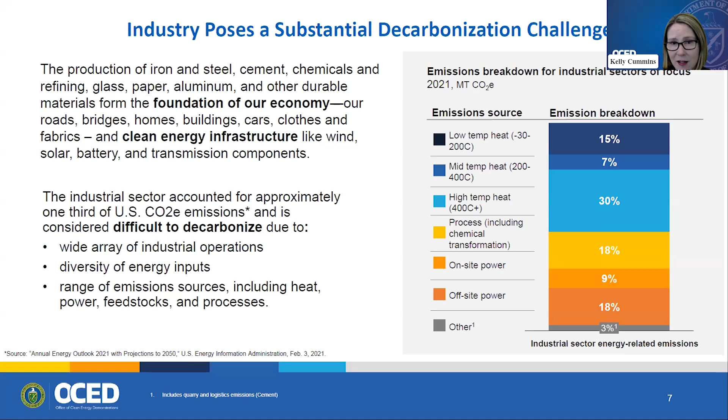The industrial sector is one of the biggest unsolved clean energy transition challenges and one of the most substantial opportunities to reshape the U.S. economy and reinvigorate the U.S. manufacturing sector. This investment in new emerging technologies will help produce clean steel, cement, and chemicals used in our nation's roads, bridges, transmission lines, electric vehicles, solar panels, and wind turbines, which in turn benefits every American.

OCED's Industrial Demonstrations Program represents a more than $20 billion public and private investment to accelerate transformational decarbonization projects in our nation's energy-intensive industries. This $6 billion catalyzing federal investment will help buy down risk in the highest emitting industrial sectors by applying a wide range of technologies, from energy efficiency upgrades and electrification to enabling hydrogen-ready fuel switching and carbon capture, utilization, and storage. This program offers a critical opportunity to solidify a first mover advantage for US industry, positioning American companies as leaders in the clean energy economy.

By implementing these projects, US manufacturers will produce many of the world's cleanest goods, which will be sought after both domestically and for export internationally as global consumers, businesses, and individuals increasingly demand transparency about carbon intensity.

So how did we get to this stage? Last March, about a year ago, OCED put out a funding opportunity announcement for the Industrial Demonstrations Program. And this turned out to be an incredibly competitive funding opportunity. We reviewed 411 concept papers in response to this funding opportunity that requested more than $60 billion in federal funding and proposed about $100 billion in matching private cost share in total.

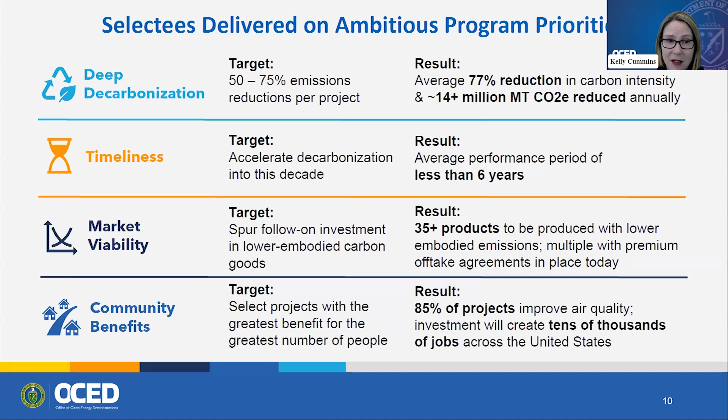Finally, we prioritized projects with the greatest benefit for the greatest number of people, especially as it relates to community health. We know that while industry provides good jobs and serves as the economic heartbeat of its communities, it has also resulted in pollution that has disproportionately harmed disadvantaged communities. We are proud to say that 85% of projects will reduce criteria air pollutants, which can harm human and environmental health. Additionally, this investment will create tens of thousands of jobs.

While over $20 billion is a huge advancement in industrial decarbonization, it is only about 2% of the total $1 trillion investment needed to decarbonize the industrial sector. Early commercial deployments of decarbonization technologies in sector-specific applications could drive cost reductions and encourage cross-sector learnings, which could boost the value proposition of similar future projects. I'm proud to say that these projects are catalyzing the scale of investment needed to meaningfully decarbonize industry.

With that in mind, let's turn to the projects we've selected to accelerate industrial decarbonization across the United States. Now that you have more context for the program and how it fits into our climate and equity goals, I will turn things over to Todd Shrader, the OCED Director of Project Management, to share more details about the projects we've selected.

Thank you, Kelly. And as Kelly mentioned, 33 projects were selected, and we're going to very quickly discuss them today. They're across multiple industries, including iron and steel, aluminum and metals, primarily copper, cement and concrete, chemicals and refining, and some cross-cutting heat projects themselves.

One thing I will note as we go through these slides, in most cases the location is shown. In a few cases it's TBD or something similar, because we're still determining these very specific project sites in a few cases. So you might see that on the slides themselves.

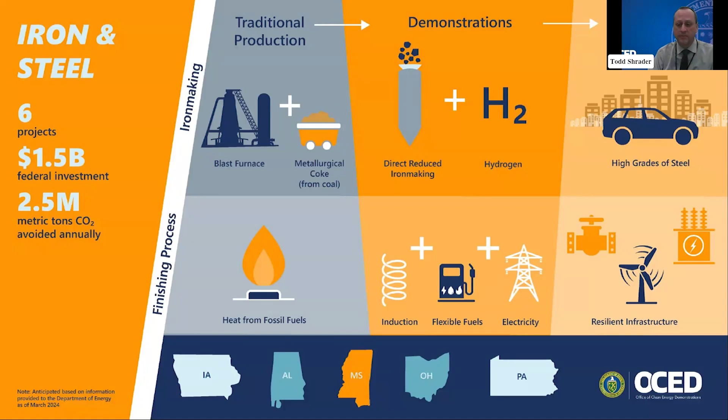So you see there: six projects, $1.5 billion total investment. These projects alone have the potential to avoid nearly 2.5 million metric tons of carbon emissions each year.

We will start in Middletown, Ohio, at Cleveland Cliffs Steel Corporation. This project is a good example of changing out the process itself, moving from a fossil fuel process for heating steel to a direct reduced iron process that uses electric melting furnaces, with a significant reduction in carbon emissions—up to 1 million metric tons per year going forward.

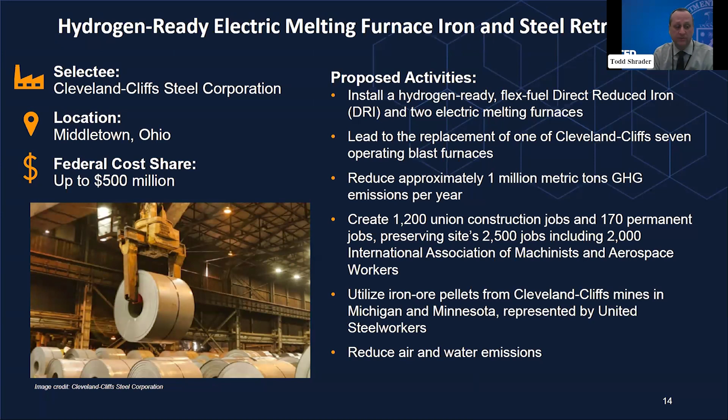It will also source the material from domestic sources. It's often the case, and you'll see this a couple times, that with fuel switching or going to an electric source versus a previous fossil fuel source, you also get reductions in water and air pollutants such as SOx, NOx, particulate matter, et cetera. So overall, better water and air emissions.

The SSAB project in Perry County, Mississippi, with an off-taker in Montpelier, Iowa, is again a zero emissions steelmaking process. The original plant in Mississippi uses direct reduced iron technology with 100% hydrogen as the power source, with plans to expand into other facilities or take the steel to other processing facilities such as Iowa. This has the potential to reduce up to 81% of potential GHG, and you can see quite a few jobs associated with this work going forward.

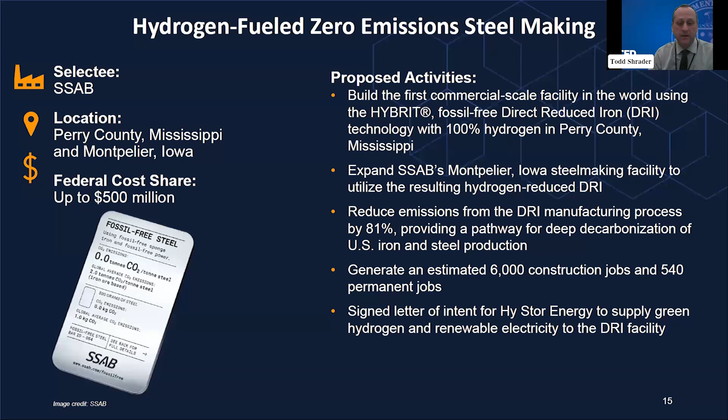The Vale USA low emissions cold-agglomerated iron ore briquette production project is on the Gulf Coast and is an iron and steel project. It's a first-of-a-kind facility for low emission alternatives versus the traditional use of iron ore pellets. So it's a little different—it's about the material itself and how it's being used going forward.

Again, looking to reduce the amount of industrial heat, which reduces CO2 emissions and the power required for the process. Overall, an estimated 60% reduction in CO2 emissions, and in this case a 99% reduction in SOx, or sulfur oxide. Again, you see quite a few jobs associated with this project.

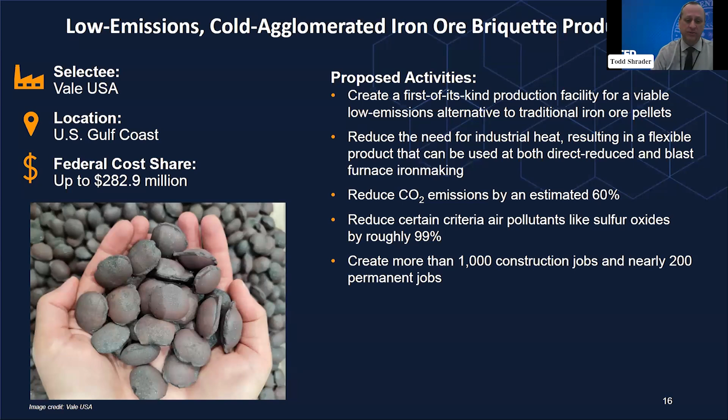Next, a project in Bessemer, Alabama: the iron electric induction conversion project, part of the United States Pipe and Foundry Company. In this case, it's replacing the furnace itself with an electric induction melting furnace—changing the process material and how power is fed into the process. In particular, it eliminates the need for natural gas and coke.

That's a 73% reduction in carbon intensity for this operation. It supports quite a few jobs, and similar to what I mentioned before, overall air quality is also increased by changing how heat or power is provided to the plant.

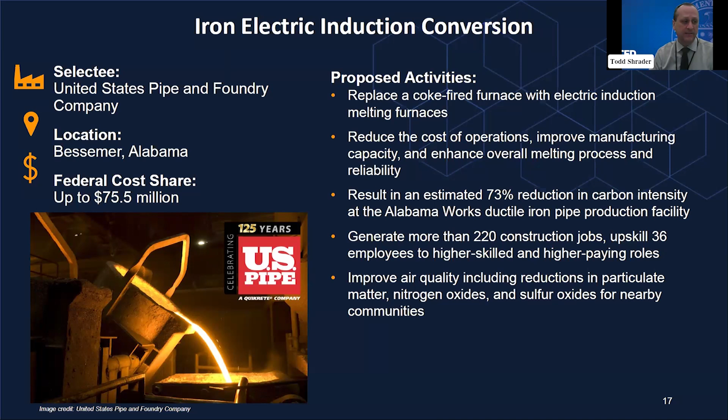Next, we're in Birmingham, Alabama, not far away. This is the American Cast Iron Pipe Company and their induction melting upgrade—upgrading a current plant. Most of these projects are upgrades to existing plants; in some cases they're new facilities, but almost all of these are upgrades to existing plants themselves.

They're replacing their existing furnace with four electrified induction furnaces, which eliminates the use of some coke, derived from coal, in the combustion process, resulting in an emission reduction of up to 95% for the facility itself.

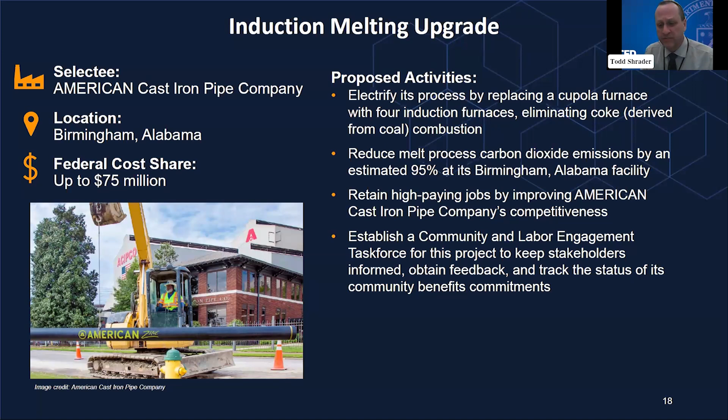It also, this is a good case where they have a longstanding relationship with local universities, and would expect that to continue going forward.

And I believe our final steel project, Cleveland Cliffs, this time in Lyndora, Pennsylvania. It's specifically their Butler Works project, the electrification of their production facility for high silicon grain oriented electrical steel, which has some specific uses.

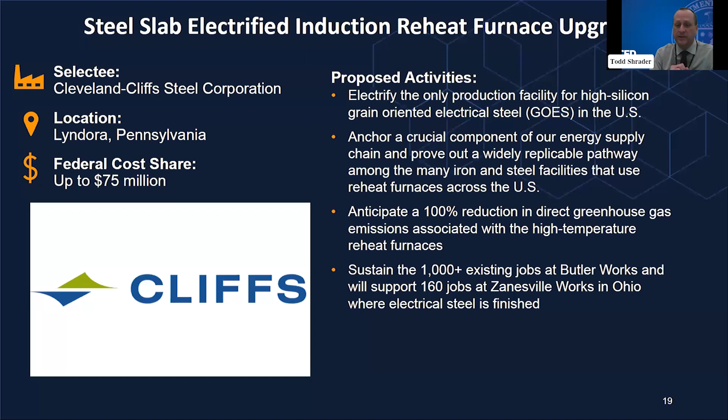This becomes a furnace installation process, and it may result in up to 100% reduction in the greenhouse gas emissions from the high temperature reheat furnaces currently used there. Quite a few jobs associated with this facility also.

So now we'll move on to cement and concrete. This is particularly exciting in that you can not only reduce your carbon footprint or carbon intensity for the process itself, down to, in the best case, 0% carbon produced, but because concrete uses carbon, you can actually get net negative, pulling more carbon out of the atmosphere or storing more carbon than the process produces. This is particularly exciting because cement itself is one of the single largest sources of carbon globally.

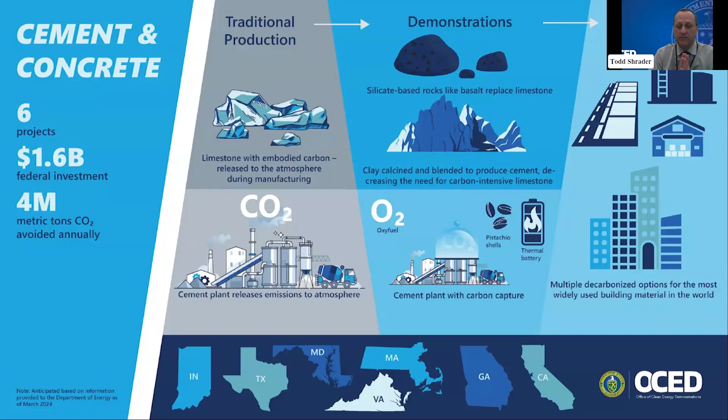So there's lots of capability to get vast decarbonization benefits from this, and a very replicable set of projects and potential changes to the industry. Overall investment is $1.6 billion, and for all of these 6 projects we're about to discuss, upwards of 4 million metric tons of carbon emissions avoided each year.

So onto the projects. We'll start in California at the National Cement Company of California, with their Net Zero Cement Plant project. It plans to produce carbon neutral cement, and instead of using fossil fuels in the process, they'll use local biomass, and you can see a couple examples there.

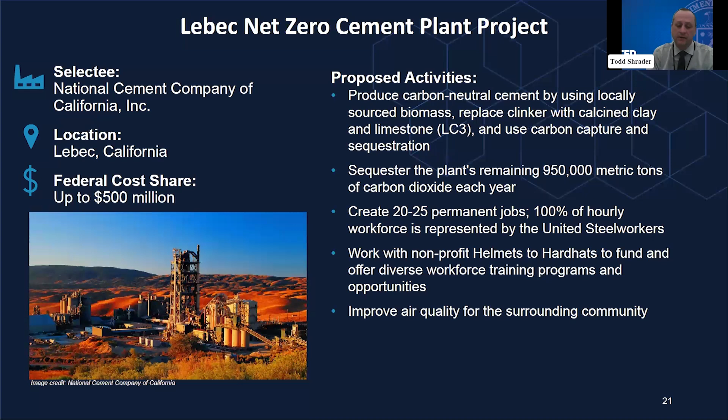And they produce a limestone clay for the cement that has the ability to capture and sequester, and will capture and sequester, some of the remaining emissions from the plant itself.

Back to Indiana, and this is the Heidelberg facility in Mitchell, Indiana, the cement plant decarbonization project. This is a case of carbon capture and sequestration, CCS, as it's often called, where the plant will capture, through point source technologies, the carbon dioxide out of the exhaust flumes or smokestacks, and then sequester it deep underground geologically.

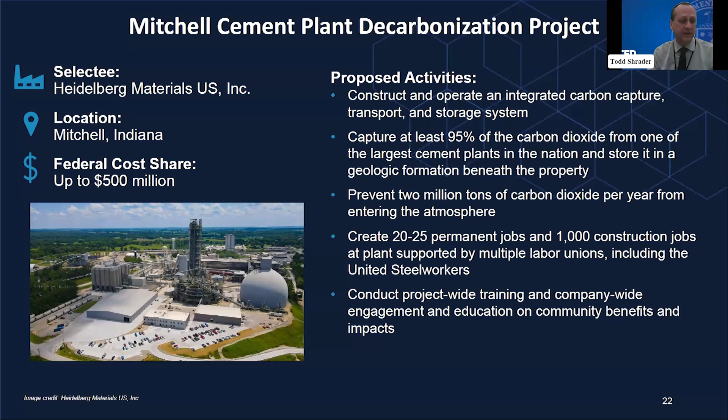This will prevent upwards of 2 million tons of carbon dioxide per year from entering the atmosphere during operations of this facility. Again, quite a few jobs that you can see there going forward.

The next facility involves a number of different facilities potentially across the country - new calcination facilities for Summit Materials. It demonstrates the viability of displacing limestone-based cement with clay-based products, using cleaner, less carbon-intensive raw materials to make the cement. This has potential for preventing upwards of 1.1 million metric tons of carbon emissions per year, and quite a few jobs indirectly associated with the project going forward.

Brimstone Energy - this one is a decarbonized cement plant. Location, as I mentioned before, some of these are still being worked out. It's a commercial scale plant that changes the way cement is made through source switching, using calcium silicate rocks and alternative production methods as opposed to the normal way cement is made. It has potential to avoid 120,000 metric tons of carbon dioxide each year going forward.

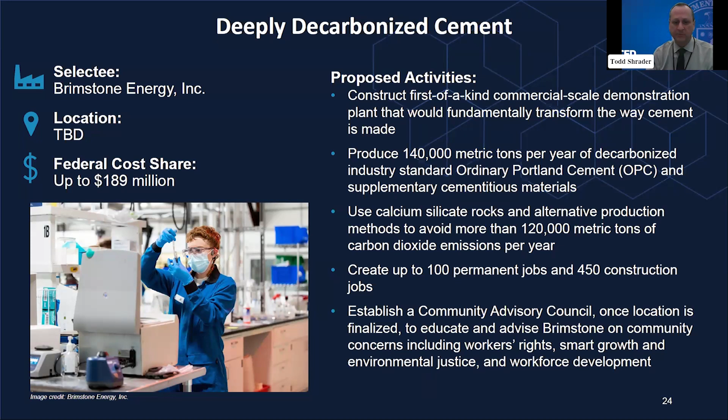So again, this is an example of it not being a process change as much as the source material and other things associated with it. You can see a number of jobs associated with that facility also.

Up in Massachusetts, Sublime Systems Inc. - electrochemical cement manufacturing. This is a good example of replacing more fossil intensive processes for producing high heat, replacing the carbon limestone with a calcium silicate based feedstock. It's a different change in how the material is made and the source raw material used. Not quite as big a project - you can see a smaller cost share there compared to others we've seen, but still able to produce a fair amount of jobs going forward, and certainly another potential replicable process.

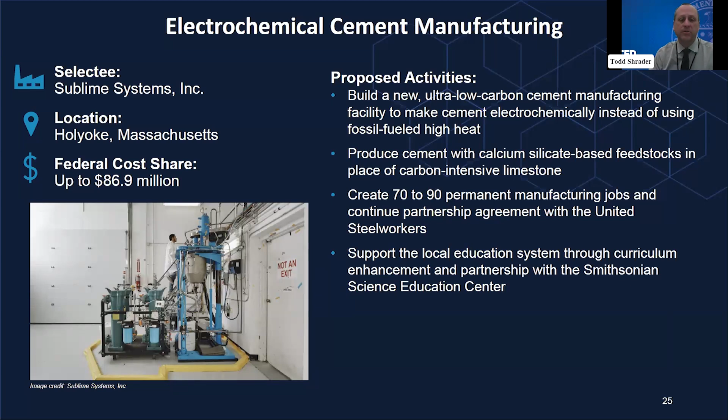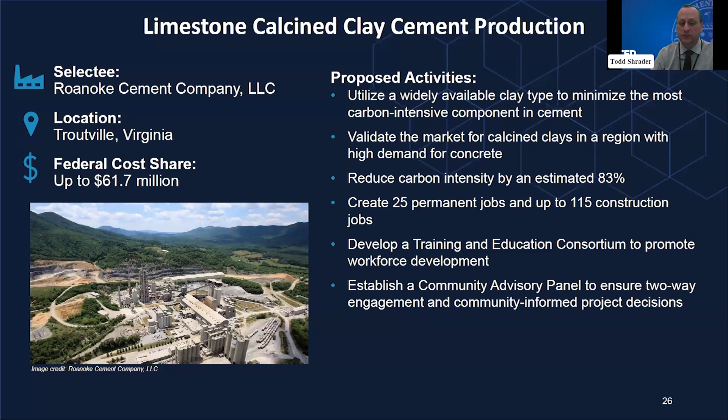Out to Virginia, the Roanoke Cement Company. This is the limestone calcined clay cement production process itself, looking at the calcined clay in the region and how you can use that in the cement production facility. So raw material substitution or switching, potentially reducing the carbon intensity of the process by up to 83% going forward. Not a particularly large project, but certainly one that, particularly in that area where there's an abundance of this clay, has real replicability potential going forward.

Now we'll talk about chemical and refining. There are 7 of these projects, and we'll talk also about one pulp and paper project itself. Chemical processing can be very carbon intensive, and it's one of the largest industrial sectors in the world. So turning its carbon intensity, addressing it, has a real potential to have a real impact itself.

We can increase the sort of circularity, or how we use waste products, getting them recycled back into the system. There are ways we can onshore critical supply chains for some of these chemicals also. It's a $1.3 billion investment in these projects, 8 total counting the pulp and paper project. There's recycling, replacing of fossil fuels for high heat processes, decarbonizing fuels. Across all of these projects, the potential is avoiding nearly 3 million metric tons of carbon emissions annually. So let's talk briefly about them.

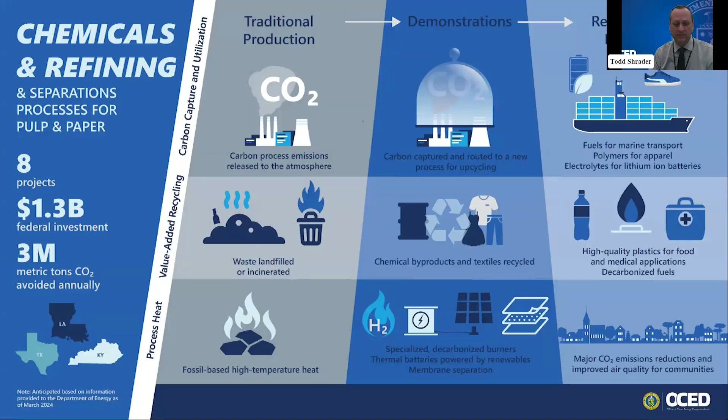Down in Longview, Texas, we have the PET recycling decarbonization project, from the Eastman Chemical Company. It's a recycling endeavor in that the company can use some of the products that maybe would have gone to landfill or other materials like that. They can recycle them back into the process and turn them back into high quality virgin PET for use in other products after that.

They also plan to use thermal storage combined with some on-site solar to help decarbonize the heating process, and that should lower the carbon intensity by about 70% compared to the use of newly mined or produced material, and overall approximately 90% reduction when you include what would have been incineration of some of these emissions. So this is a way to turn waste materials or materials that would have left the site back into the process and make it more efficient and certainly cleaner.

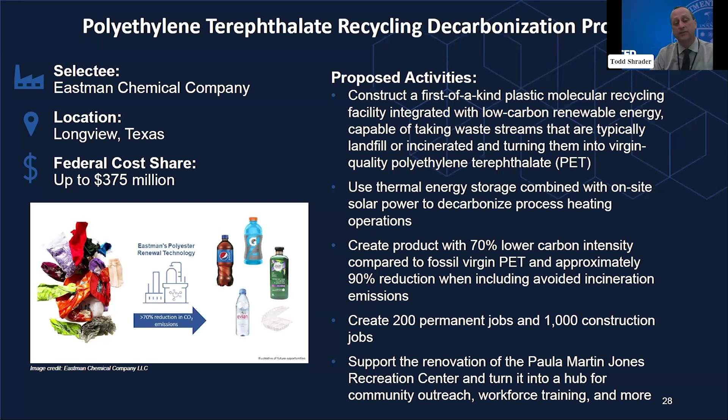Baytown, Texas, the Exxon facility down there. This is the Olefins Plant Carbon Reduction Project, and it's basically going to enable the use of hydrogen in place of natural gas for the facility. So a pretty standard fuel switching operation. Hydrogen burns cleaner than natural gas, with some new burner technologies particularly for the production of ethylene at the facility.

It will enable up to 95% clean hydrogen fuel to be used and avoid 2.5 million metric tons of CO2 production per year, or more than half of the total plant's emissions, along with quite a few jobs associated with this facility. This is another case where by using that switching, other pollutants also get reduced. There are criteria air pollutants mentioned at the bottom there, so it's not just a CO2 reduction, overall emissions get much cleaner with this.

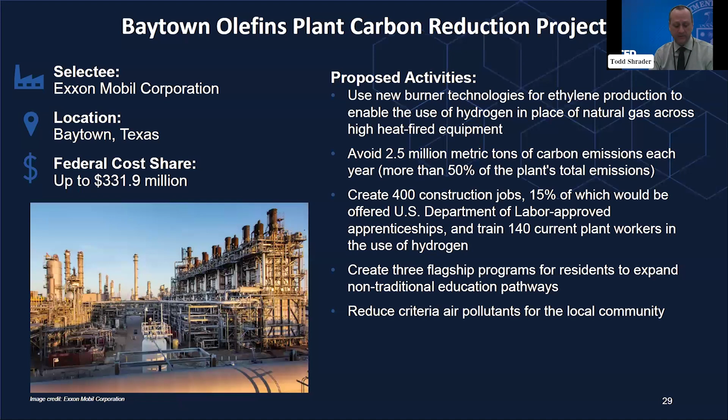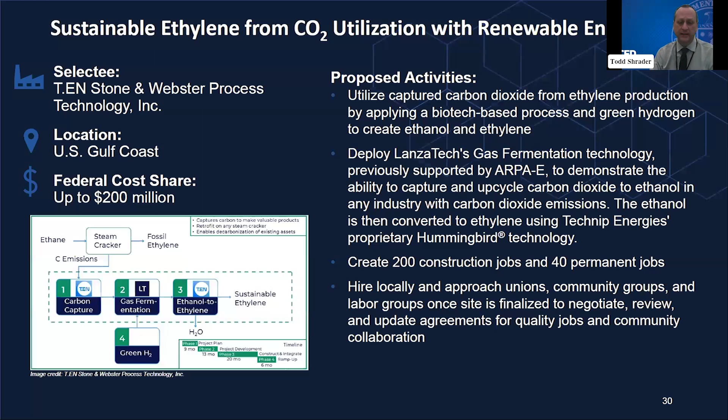The T.EN Stone and Webster process technology, sustainable ethylene from carbon dioxide utilization with renewable energy, acronym SECURE, is going to be down on the Gulf Coast. It's like a recapture project where you capture and recycle the emissions from some of the chemical processes and turn them back into products the plant could use. In this case, it's utilizing captured carbon dioxide from ethylene production, capturing it through biotech-based processes and green hydrogen, and using that to create ethanol and ethylene going forward. There's a fair amount of construction jobs and some permanent jobs associated with the project.

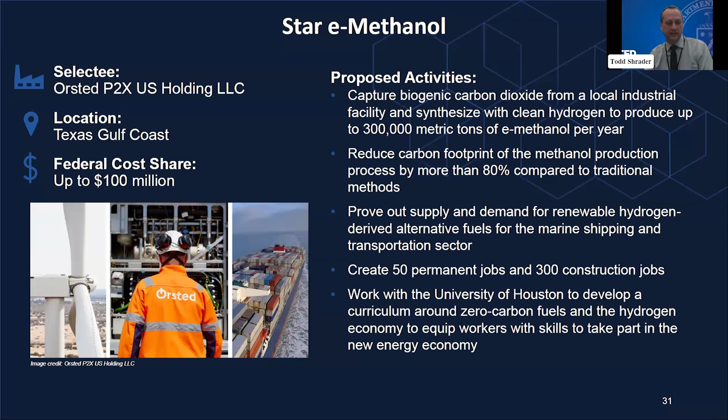The STAR e-methanol project down on the Texas Gulf Coast is led by a subsidiary of Ørsted. They plan to capture carbon dioxide from local industrial facilities, synthesize it with clean hydrogen, and produce e-methanol, a much cleaner methanol that reduces the overall carbon footprint of this sector. It's estimated to produce 300,000 metric tons of e-methanol per year, and that use would reduce the carbon footprint by approximately 80% over traditional methods. There are construction jobs and associations with local universities in the area.

Dow Chemical Plant down in the U.S. Gulf Coast itself. You can see its utilization of electric vehicle battery chemical production. So it's new construction. Plans to design and construct a facility at one of its sites to capture and utilize 100,000 tons of carbon dioxide. So again, you would point-source capture the carbon dioxide before it can leave the plant, and then use that carbon dioxide to produce essential components for solutions needed for domestic lithium-ion battery production itself. So again, it's kind of closing the cycle of the production facility itself going forward.

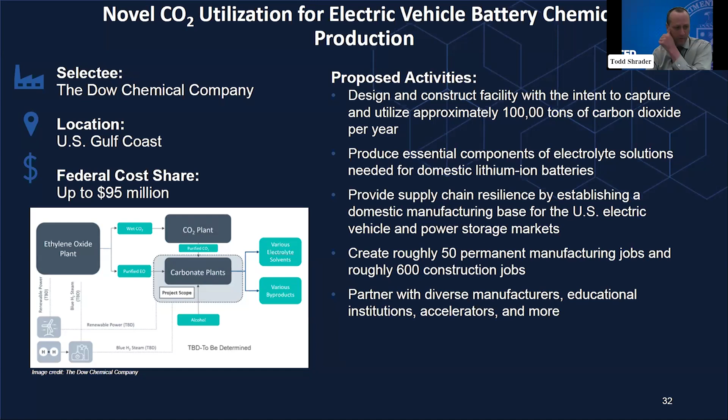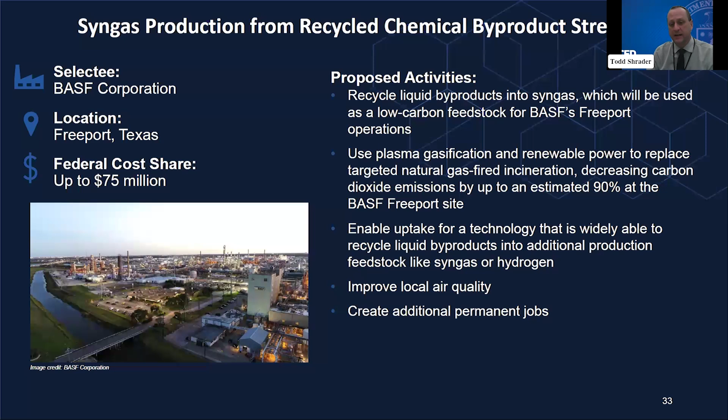BASF Corporation in Freeport, Texas. It's syngas production from a recycled chemical byproduct stream. Similar to some things we've talked about before, you recycle some of the liquid byproducts from your facility into syngas, which can then be used as a low-carbon feedstock for other operations, in particular the Freeport operations for the company. They can use plasma gasification and other forms of renewable power that allow them to replace natural gas incineration, decreasing carbon dioxide emissions at this site by an estimated 90%. Again, a good example of taking what normally would have been waste leaving the plant and reusing it within the plant itself, closing the cycle.

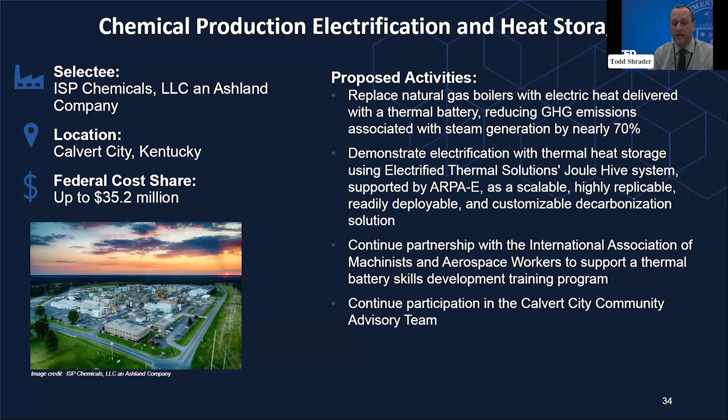This is the ISP chemical plant in Kentucky. It's a chemical production, electrification, heat storage facility. The plans are to replace natural gas boilers with electric heat from thermal batteries or other clean sources, which should reduce GHG emissions by about 70% for the steam generation associated with the plant. The heat generation involves some new technologies for thermal heat storage. We believe it's very replicable, so it's a good demonstration scale for this going forward.

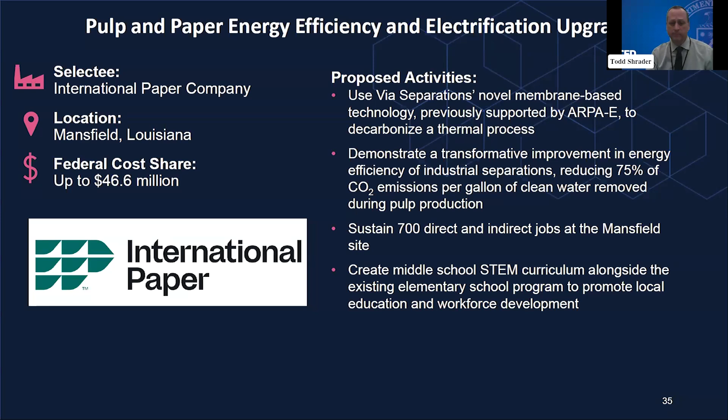Pulp and paper: this is the International Paper Company in Mansfield, Louisiana. This is a project in which International Paper is using a Via Separations process, partnering to decarbonize the thermal process used in the plant. You have to use the heat within it. What's interesting is it's a new membrane-based technology, a bit different from what's traditionally used in the process, and it has a chance to reduce 75% of the CO2 emissions from the facility compared to other uses of water. There's a significant amount of jobs at the site, and again this membrane technology has real potential to be replicably used in many different activities.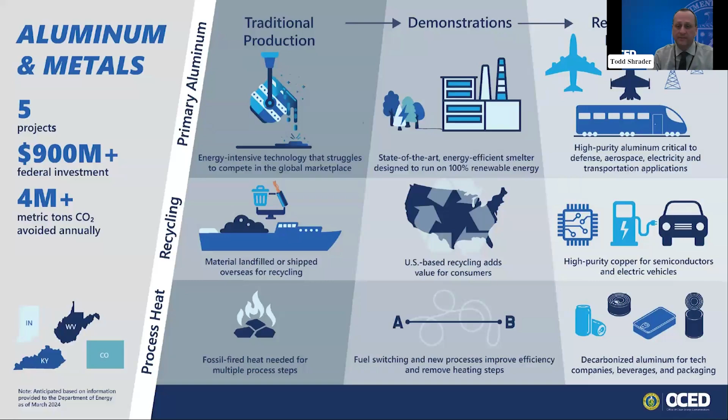Aluminum and metals - and when we say metals here, we generally mean copper. We've selected five projects in this area representing a major capital investment to decarbonize primary aluminum in this country. They support, in some cases, some very first-use and world-leading recycling approaches. Not only will this simultaneously decarbonize these processes, it will frankly onshore or bring back some supply chains of critical materials, particularly for the defense industry and energy sector, addressing national security and supply chain issues. So with that, let's get into the projects.

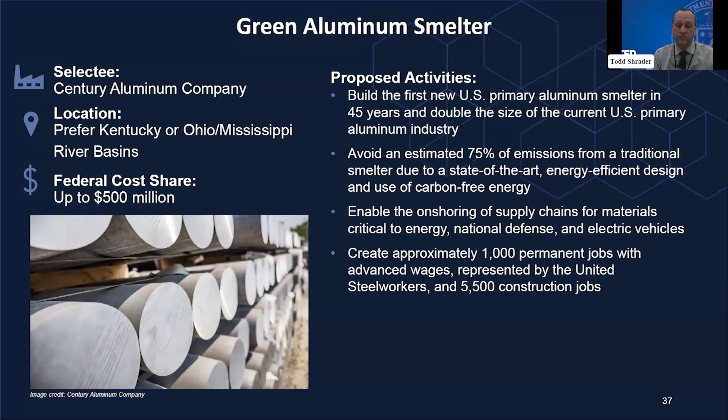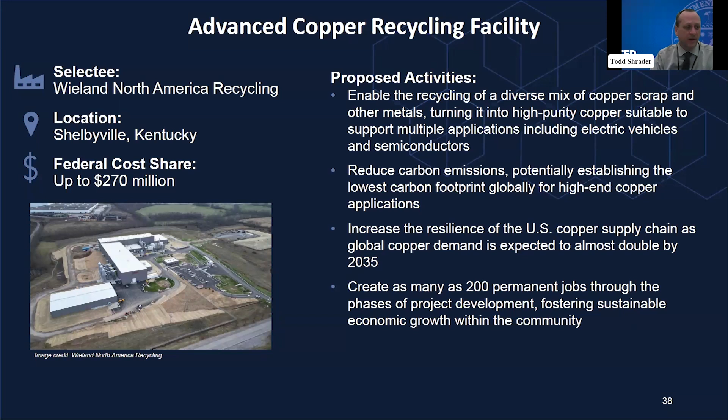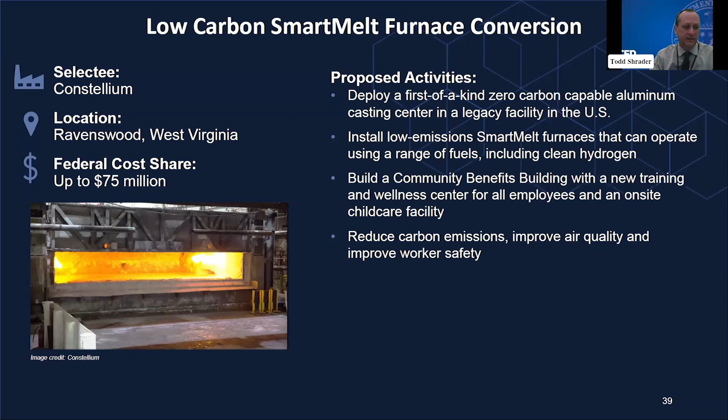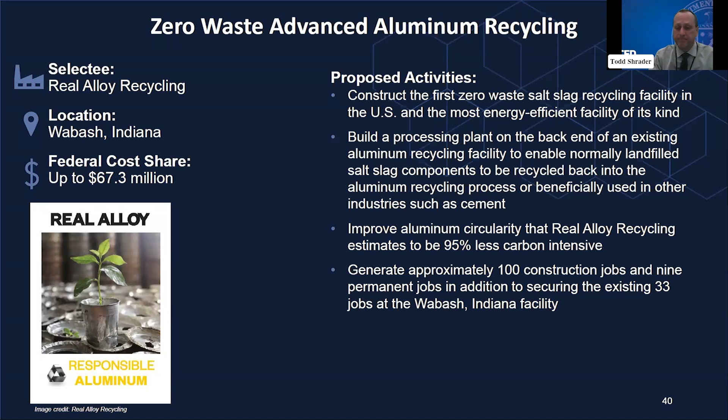This is Real Alloy Recycling, the selectee, in Indiana. The project is Zero Waste Advanced Aluminum Recycling. This one is interesting because there's a very specific waste stream, salt slag, that is going to be recycled using a recycling facility in Indiana. It builds a processing plant on the back end of the existing facility, where normally the salt slag would have to go to landfill or be wasted. Now it can be recycled back into the aluminum process itself, so there's a significant reduction in the overall carbon intensity for the process, up to 95% going forward. And you can see the jobs associated with that project.

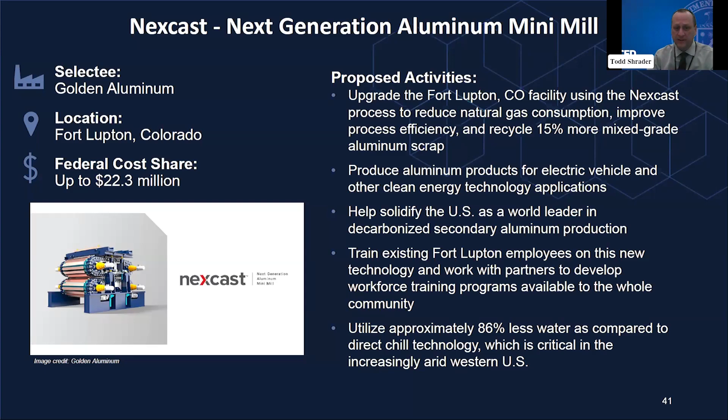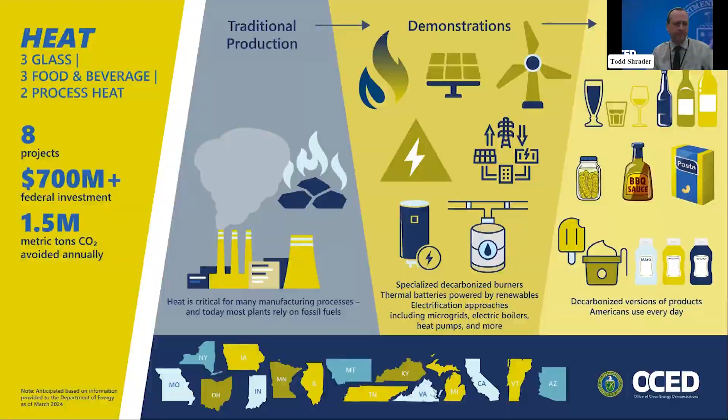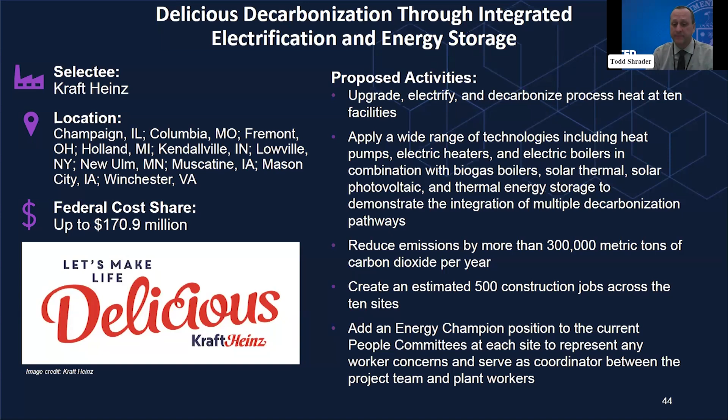Kraft Heinz, and you can see a number of locations there. It's delicious decarbonization through integrated electrification and energy storage. Might be the first time delicious and decarbonization have been used in the same sentence, but it's very applicable considering the products the company produces. It's to upgrade, electrify, and decarbonize the numerous processes at up to 10 facilities used in various food and beverage production activities. It's a combination - each plant will do something a little different based on the characteristics of the heat they need and what's at the plant now. So it might be heat pumps, electric heaters, some boilers, some solar thermal, some thermal storage. It'll vary based on the plants themselves and be tailored for each facility, but it should reduce emissions by over 300,000 metric tons every year of carbon dioxide going forward.

Diageo Americas will supply heat batteries to decarbonize the beverage industry. The company plans to replace its natural gas-fired heat with heat batteries, which produce less CO2 themselves and are powered on site by renewable energy, along with electric boilers at the facilities. With these upgrades, carbon dioxide emissions should be reduced by upwards of 17,000 metric tons every year for these beverage supply projects going forward.

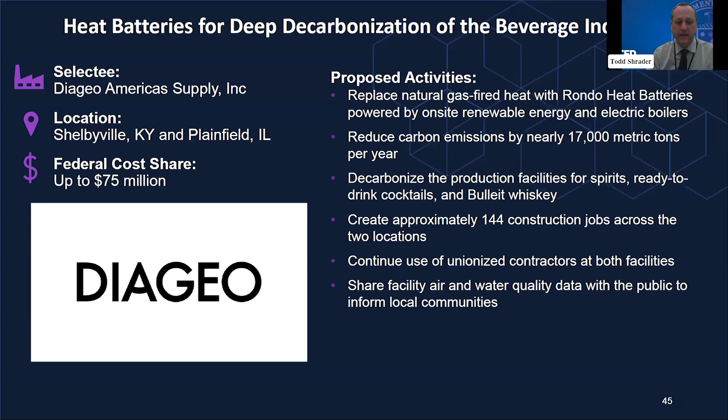Unilever is decarbonizing its ice cream manufacturing at several plants across a number of locations. Similarly, they're reducing or replacing natural gas boilers with electric boilers and industrial heat pumps at some manufacturing facilities. These upgrades are expected to reduce carbon dioxide emissions by upwards of 14,000 metric tons per year. Again, this is a good example of using a cleaner fuel for the energy input—electric boilers instead of natural gas.

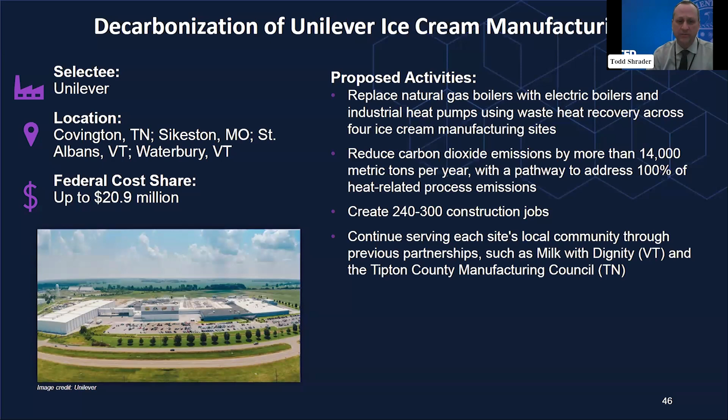Now, glass. Three glass projects were selected, expected to validate different types of furnaces, particularly electric fuel hybrid furnaces, to produce glass in a more low-emission setting. Let's talk about the three projects themselves.

O-I Glass Inc. has locations in California, Ohio, and Virginia, working on glass furnace decarbonization technology. This involves rebuilding existing furnaces at these facilities to reduce the carbon dioxide scope with new technologies, avoiding 48,000 metric tons per year, about a 40% reduction in scope 1 emissions across the four furnaces and production lines. These plans involve rebuilding with much more cutting-edge technologies for each furnace, combining different technologies, marking the first time many of these have ever been implemented simultaneously within furnaces.

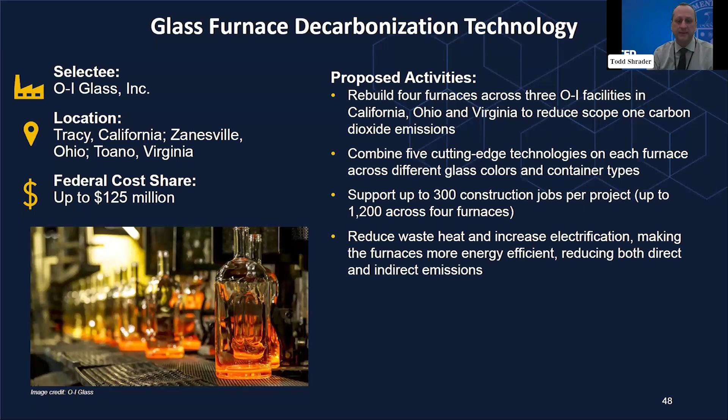Gallo Glass Company in California has a hybrid electric glass furnace project. They're going to install a hybrid electric furnace that will significantly reduce natural gas use—not completely, but by up to 70%—and allow an increase in recycled glass content by 30% in the production of glass bottles. It's anticipated to create new jobs at the site, and the company has a history of partnering with the community in its activities.

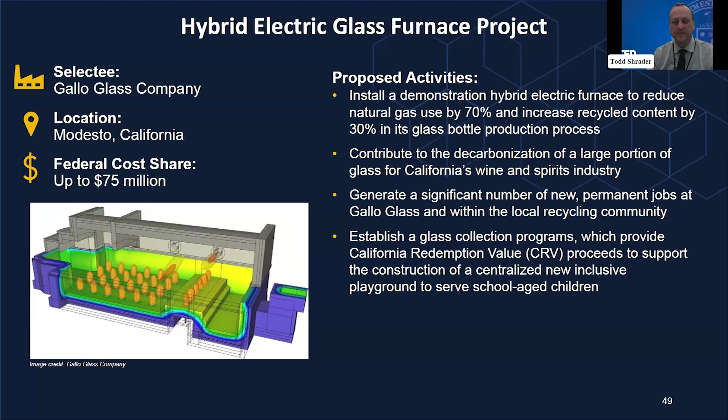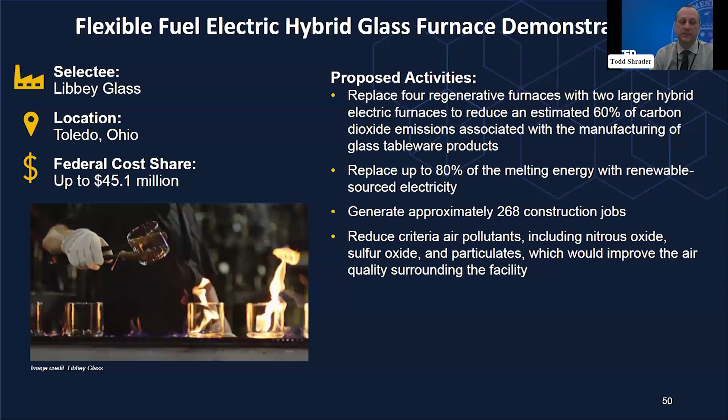In Toledo, Ohio, Libbey Glass is running the flexible fuel electric hybrid glass furnace demonstration. As with the others, the technology is similar but each use case is a little different. They plan to replace four regenerative furnaces with two larger hybrid electric furnaces, allowing more use of electricity and lower reliance on fossil fuels for heat and power. It's estimated to reduce carbon dioxide emissions by about 60%. The hybrid furnaces combine the benefits of oxygen fuel with electromelting, and they intend to replace about 80% of the energy with renewably sourced electricity going forward.

Now, process heat projects. There are a couple of projects producing heat with a wide range of applications. In fact, across almost all of these projects, heat is a key part of the process—whether for metals, chemicals, food, or whatever it might be. So finding ways to produce heat in a less carbon-intensive way, or to reduce emissions, has the potential to help many industries.

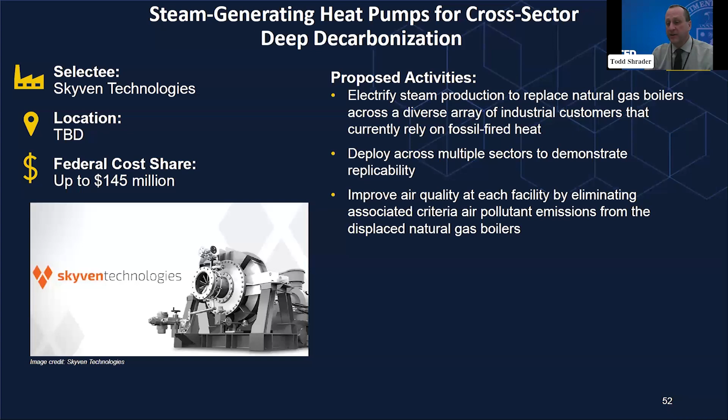Skyven Technologies, still working out where this project will go, involves a steam-generating heat pump for cross-sector decarbonization. In essence, it's electrifying steam production, replacing natural gas boilers with electrified steam arrays that can be used for many different applications, reducing fossil fuel fired heat with electrified steam heat. Another side benefit of replacing fossil fuels with electric heat is improved air quality overall for the facilities.

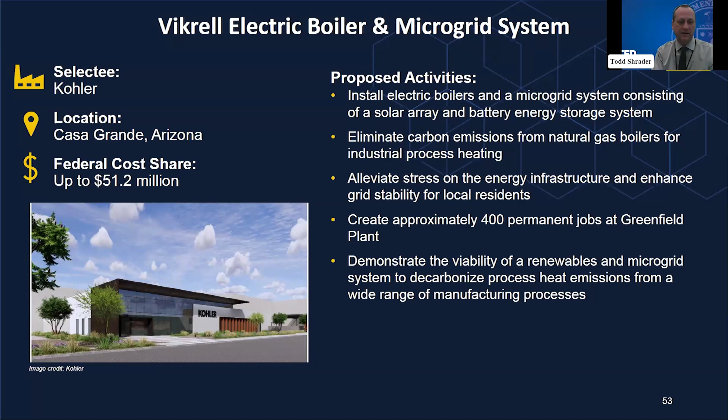Very impressive, Todd. 33 projects in less than 40 minutes. I'm not sure I could have done that. So now let's look at how each sector is approaching decarbonization.

This is a snapshot on the next slide that shows crossover between IDP sectors and the decarbonization levers identified in the department's Pathways to Commercial Liftoff report. As you can see, the projects we're announcing today substantially address the decarbonization opportunity space identified in that report, especially in iron and steel and cement and concrete.

And while we have many levers covered in the chemical sector, the diversity of production processes means that the levers demonstrated vary throughout the portfolio. That said, this is just an early start at what it will take to address industrial sector emissions. We encourage everyone to visit liftoff.energy.gov to learn more.

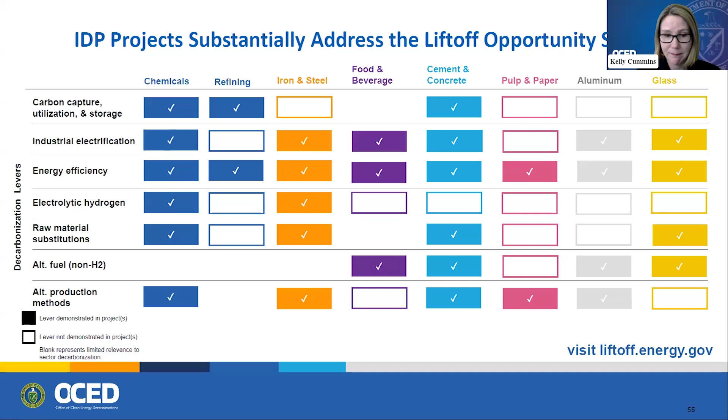Now let's talk about the expected community benefits resulting from these projects. All of OCED's projects, including the Industrial Demonstrations Program, are covered by the Biden administration's Justice 40 initiative. Justice 40 creates a goal that 40% of the overall benefits of certain federal investments, including those in clean energy, flow to disadvantaged communities. I want to highlight that the 40% refers to the benefits of funding, not 40% of the funding itself. DOE is implementing Justice 40 through our community benefits framework process, which is key to the success of each industrial demonstrations project.

So the IDP Community Benefits Framework has 5 interdependent parts. First, community and labor engagement, which seeks to involve those impacted in decisions that affect them and create projects responsive to the needs of communities and workers.

Second, diversity, equity, inclusion, and accessibility, which seeks to help build a clean energy economy reflective of all Americans and to ensure equitable access to wealth building opportunities for all.

Third, investing in the American workforce, to build the skilled long-term workforce needed to power the energy transition and create quality family sustaining jobs.

Fourth, the Justice 40 initiative, which I just mentioned. And fifth, the greatest benefit to the greatest number of people.

This pillar is unique to the Industrial Demonstrations Program. It's consistent with language in the Inflation Reduction Act, and it seeks to provide the greatest good to the greatest number of people in the project's surrounding communities, including through the reduction of other pollutants and waste streams. Basically, we are focused on making communities healthier.

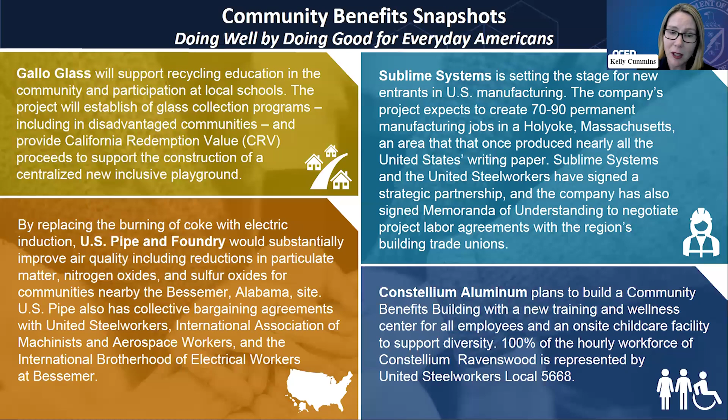And these represent just a few examples. To learn more about each project's community benefits framework, please visit the Industrial Demonstrations project webpage, and we will make sure that you have access to that link.

Now that I've shared some details for each of the selected projects, let's talk about next steps and how to engage with OCED.

OCED will soon begin the negotiation process with each selectee. These projects have not been awarded yet or received any funds from DOE. During negotiations, OCED will discuss how selectees can make their projects more robust from a technical, financial, and community benefits standpoint. If the negotiations are successful, they will conclude with OCED making an award.

OCED and the selectee will enter into a cooperative agreement, which gives OCED substantial involvement through the public-private partnership. After award, the project moves into the detailed project planning phase and then into development.

During the award, DOE will be actively engaging with our commercial partners and impacted communities. At this point, project scope will be more defined, so we will be able to share more detailed project information, including a summary of the community benefits framework. DOE will also ensure compliance with the National Environmental Policy Act and the National Historic Preservation Act and other applicable laws and regulations, including engagement with communities and tribes as required.

Broadly, project stakeholders should expect significant engagement with OCED and potential future awardees. DOE is also exploring how regional frameworks can bolster collaboration across partners and projects to maximize benefits. Such efforts will be aligned with the OCED engagement activities.